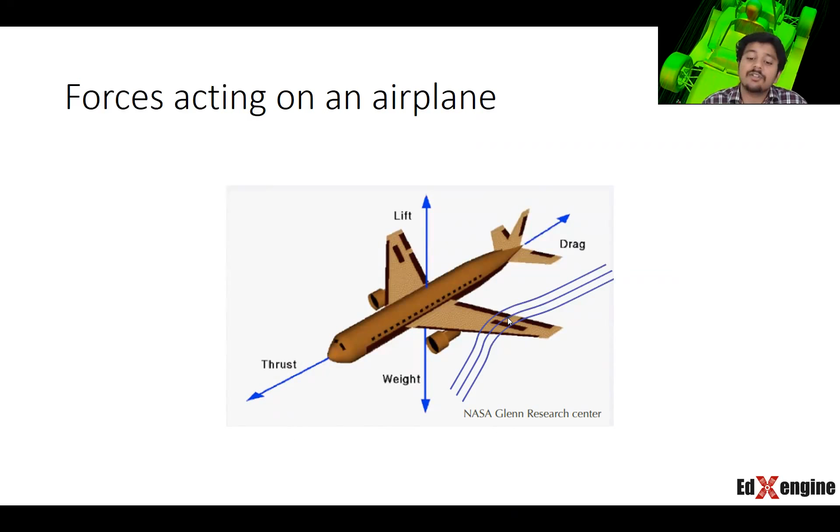And that is what people call as, what is the name for it? The thing right here. What is it called? Does anyone know? It's called an airfoil, exactly. So you might have seen this picture a lot, but many of us do not know what this is.

So we look at a cross section of an airfoil, and when you are designing an aircraft, you have to design multiple such cross sections, and that is what aerodynamics is all about when it comes to designing a flight. Now there are so many things. For example, if I cut this section and look at it in front view, it's going to look like this, right? I hope everyone can agree on this.

Now here, let's take a look at a couple of the terminologies. So from the starting point to the ending point, if I draw a line, that's called a chord line. All right. And similarly, I can draw a mean line, which is basically an average between the two curves. So at every point, if I just take the average, that's the mean line. So the mean line and the chord are completely different. I hope you can see it.

Chord is just joining the starting and ending point. Whereas in the mean line, you're taking the upper value and the lower value, averaging it, and computing a mean line. The distance between the chord line and the mean line is called a camber. Now, these are really elementary topics in aerodynamics, which you might have studied in a simple textbook, right? That's not the whole part.

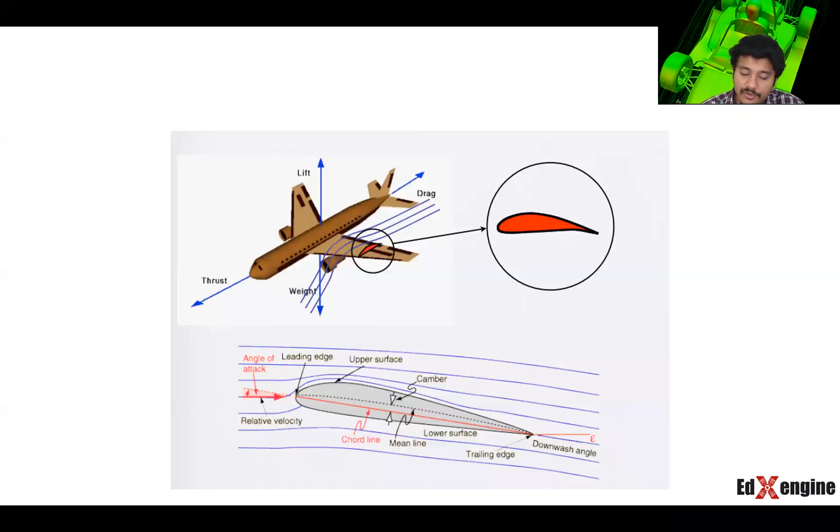A reverse wing is used in F1 cars. I don't know if you are all fans of Formula SAE, but if you look at those cars, we have a wing which is opposite to an aircraft's wing because it is designed to generate downforce and not upward force. This downforce is going to push your car and make it stick to the ground more. So when you're taking a turn in a corner at a very high speed, you are able to make the turn successfully, and downforce is required for that. All right. So let's go to a different picture.

So we have a parameter called angle of attack, which is fairly straightforward. It's basically how your airfoil is facing the wind. If your airfoil is aligned with the direction of the wind, then the angle of attack is 0. But if you've traveled on a plane, you'll see that when the plane flies, the wing has flaps, which actually change that. When you do that, you are increasing your angle of attack.

Now, when angle of attack increases, you get a larger lift. But what happens if the angle of attack goes beyond a particular value? Can anyone tell me? Stall. That's good. Can anyone tell me what stall means?

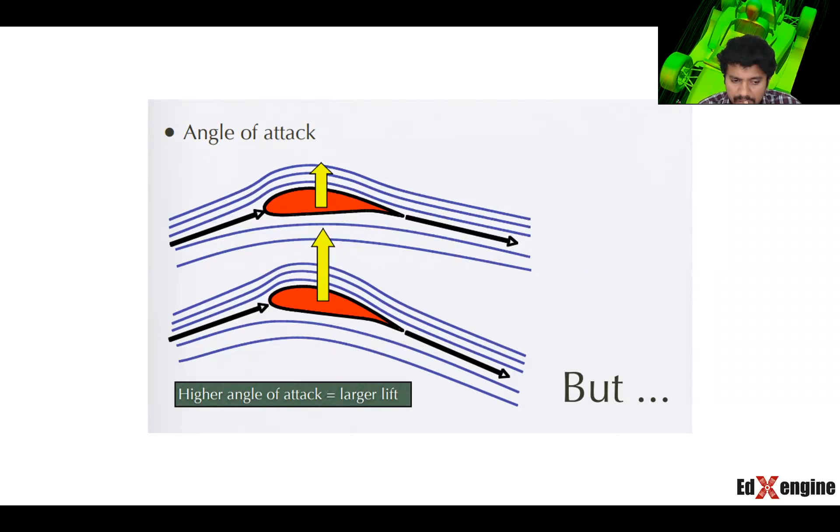Loss of lift is stall. But why does stall occur? What's the physics behind it? Can you think one step below? Why does lift drop? Exactly, flow separation. So who is the person? Tejas. So Tejas answered it correctly. The flow actually separates. Well, why does the flow separate? Because of viscous forces, exactly.

So can anyone tell me the physics in this particular zone? What are certain things that happen here? It's called the wake region. Can anyone tell me? Yes. The answer I'm looking for, Tejas hit it on the head - pressure is reduced. Can you tell me what pressure is reduced? There are two types of pressures. Are we talking about static pressure or dynamic pressure? We are talking about the static pressure.

Looks like a lot of people do not know the difference between static and dynamic. You guys need to read about it. So the static pressure drops. When the static pressure drops, at the end of the day your net pressure difference is getting affected, and because of that you are losing lift.

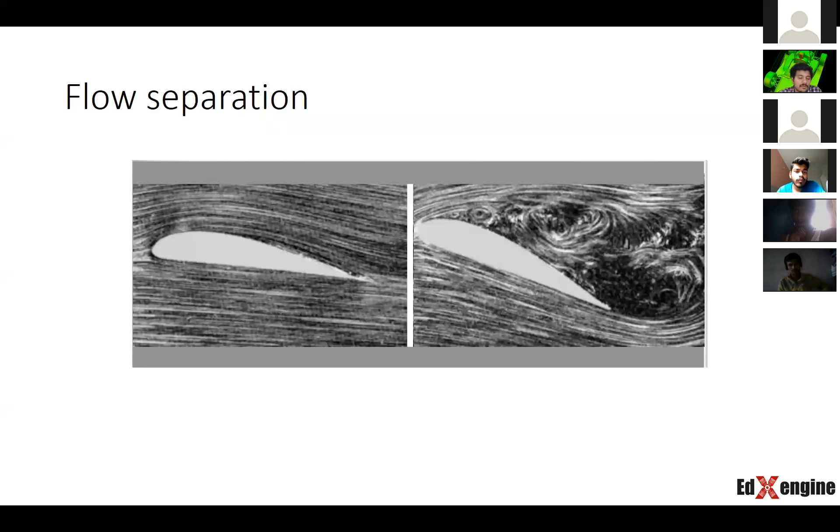In addition to this, there's one more drag force. Can anyone tell me what it's called? Friction drag, or what is it also called? There's a drag force associated with how the materials have been made - it's called skin drag. Exactly. So there are two types of drag: skin friction and pressure drag. Skin friction is more or less a constant, it depends on your geometric properties, but your pressure drag is a function of angle of attack. Now, based on this, you can compute a drag coefficient.

So a drag coefficient is nothing but a normalized drag force. So what does normalized mean? In engineering, you might have studied normalized, right? You might have not understood what it is. So think about this way.

Let's say you are running a 100-meter race. If 4 people are running the race, at a particular time the first guy is at 63 meters, second guy is 40 meters, third guy is 20 meters, and the fourth guy is like 70 or 75 meters. The idea behind normalization is instead of remembering these numbers, you take that number and divide it by the maximum number. So at a particular time, the guy's position can be given as his current distance, 63 meters, divided by the total meters, which is 100. So that's 0.63. You can represent the numbers now in these non-dimensional or normalized quantities.

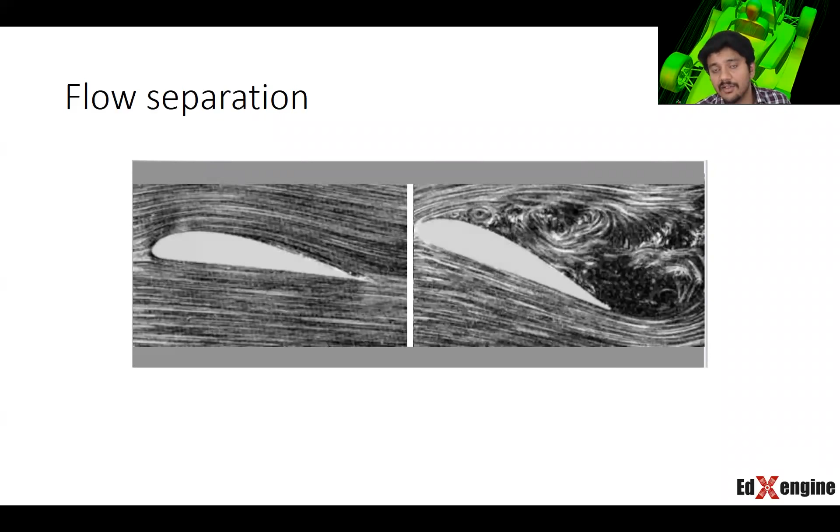Because if the flow separates early, the separation zone is going to be more. So in cases where we are not worried about the lift, the pressure drag is going to go up. But if I just keep pushing my separation point downstream, I can actually have a smaller wake region where my pressure loss is also minimal. So my drag coming from a pressure drop is going to be less.

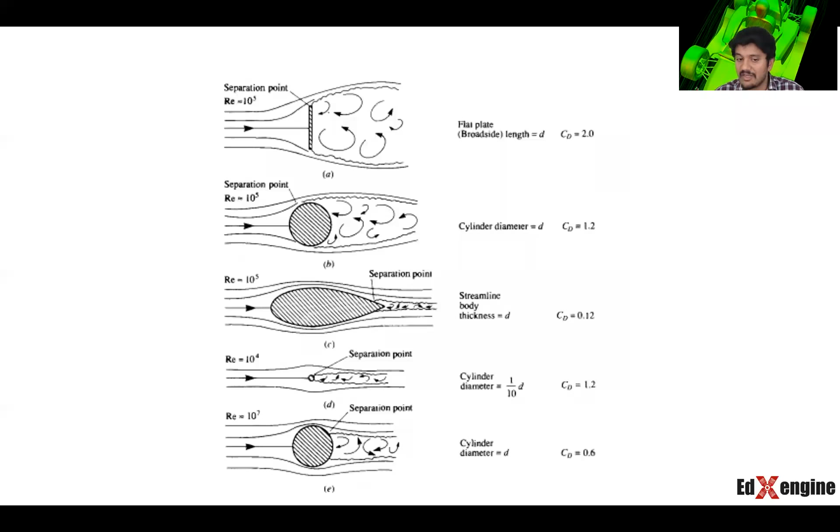Now, we are at a stage where we cannot just do simple calculations to come up with drag coefficient reduction strategies. Those times have gone. People were able to do it when cars were all rectangular. You can still see people driving rectangular cars, but now all cars are starting to look very similar. Why? Because they all have a streamlined shape, and flow separates much later in those cars, in terms of the position where it separates.

So how do we determine strategies to reduce drag? Now that you have some information, as engineering students, what are some of the strategies, or how will you go about determining a strategy to reduce drag force? What are some of the things that you will tackle?

Please explain about normalization again. Maybe I'll do it later, Mohammed.

Streamline the body, all right. So what does streamlining mean? How would you go about streamlining it?

Reducing weight is actually a fantastic option. Reducing the area is also a good option. So in the hand example, when I'm driving on a bike, if I keep my hand out like this, I'm going to get all that force on my hand. But if I just close my hand like this, the force is going to be smaller. This area is called the frontal area. You need to make sure you're reducing the frontal area of the car. So what does frontal area mean? When you're looking at the car in the front view, whatever area you see, that is called the frontal area.

Reducing contact angle—I don't know what that means. Streamlined in a way so that the flow moves around the body. Okay, that's correct. Slanting of the windshield, sure, why not?

Now a ball without those dimples is going to have a lower efficiency, right? And this is what drag does to you in terms of your final output. You need to start thinking about these connections. Instead of just thinking about drag as a force and keeping it abstract, try to apply it to real-world applications and try to understand what's going on.

Okay. Now, here's the thing. So far in aerodynamics, we have talked about drag force and maybe lift force, right? You want to make sure that lift is higher. Similarly, if you push the separation point, your lift will be higher. And that is why people have invented flaps. When you change the flaps, you are essentially changing the angle of attack without causing the flow to separate early. That is why when flaps are used, you get additional lift.

But are lift and drag the only problems we have to deal with in aerodynamics? What else is there? These are problems that have been studied from the 1960s and so on. So what are the other problems? Can anybody think of a problem? Okay. See, this is another problem I see when you're studying a subject. Try to have an open mind and ask a lot of questions. And you are not the only person to be blamed; the way things are being taught is also a reason for this. But think about other applications.

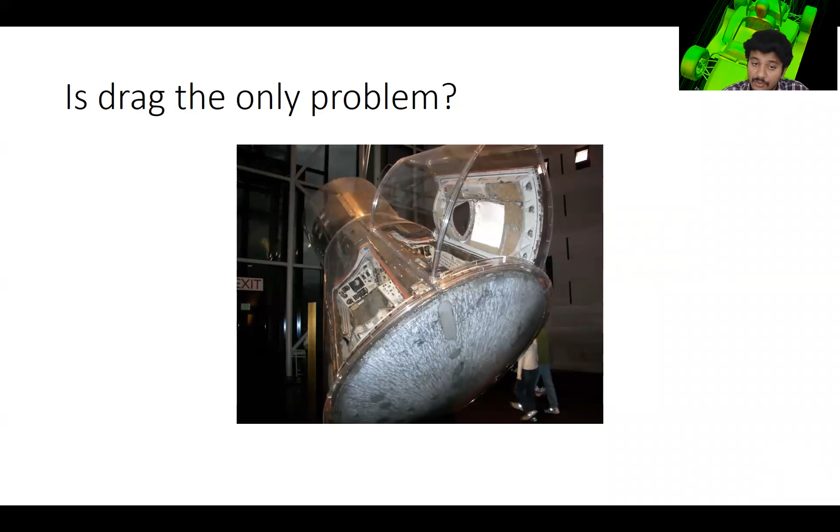So let me show you something more interesting. Here, this video I'm showing is from SpaceX. I hope you are all familiar with SpaceX, right? It's Elon Musk's company. You are looking at the heat shield, and we are trying to do a computational fluid dynamics simulation on this, all right? We have created a computational grid. This is the technology that SpaceX uses.

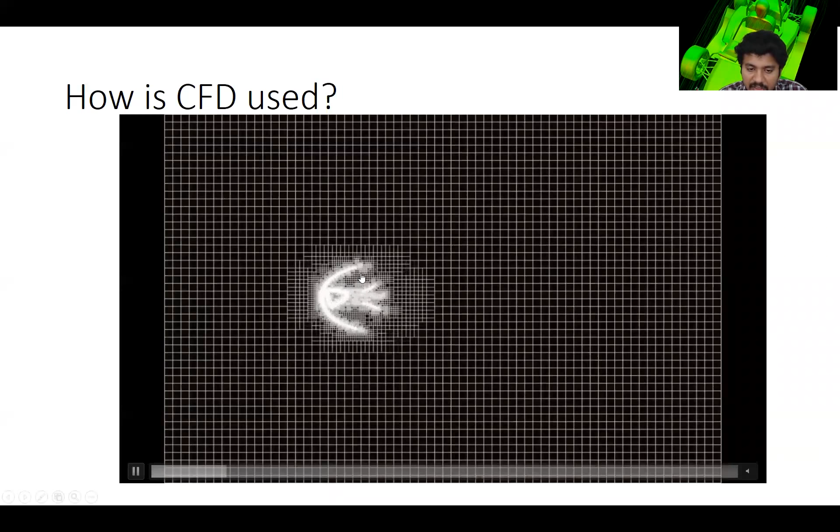So when I play this, it's going to take a little bit of time, and then you will immediately see. I'll just pause the video here. So you have this heat shield here, and you have a shock front. Can anyone tell me what the shock front is called?

There's a name to it, just because of the way it actually looks. It looks like a bow, right? Since it looks like a bow, it's called a bow shock. Now, what's happening here? We don't see any flow, but what's going on? Well, we are looking at only the computational mesh.

Now, this is a CFD simulation. We're slowly getting into CFD, right? Because with CFD, you are able to simulate all of these things. You are looking at the computational mesh alone, and the mesh is automatically being refined where the shock occurs. So you can think of it like this.

I'm pretty sure you guys have different types of phones. Some of you might have iPhones. Some of you have very cheap Android phones. Now, let me ask a simple question. Assume that all the phones are the same brightness, okay? Say you are looking at a wallpaper that is just white screen.

Some of you who have already attended this workshop before might have heard this question, so don't answer if you're one of them. But if you're looking at a white screen on an iPhone 10, the $1,000 iPhone, or your Android phone, on which of the screens is the clarity going to be better? You're just looking at a simple white screen. So everyone is saying iPhone.

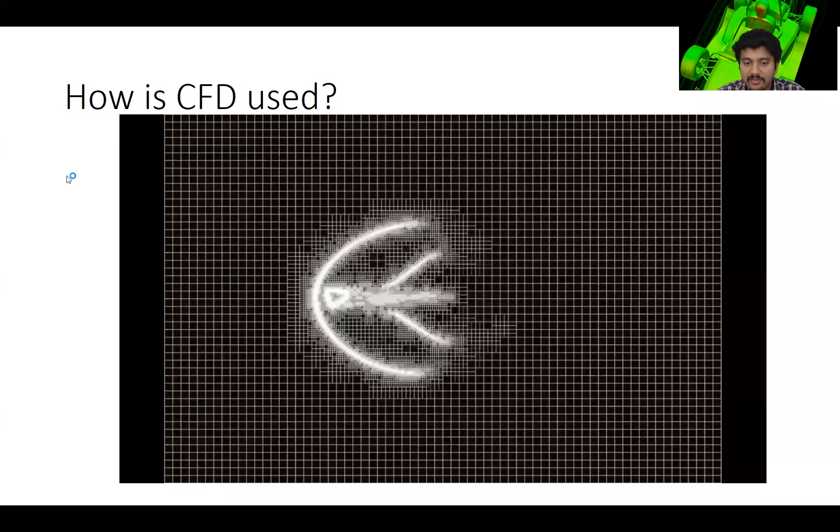Now, as far as how adaptive mesh refinement works, it's more mathematical. We look at the curvature, which is the second order derivative of flow quantities. It can be temperature, velocity, and density. You look at those quantities, and based on that, you refine the mesh. Again, this video is from SpaceX. It's their in-house solver.

So let's look at some more images. Here, what you're basically looking at is how the vortices are shedding. If I just play this, I think it's going to start playing somewhere here, right there. You see how the vortex sheds. And you can see the computational mesh is overlaid on top of it, and how this adaptive meshing captures not the shock, but the vortices.

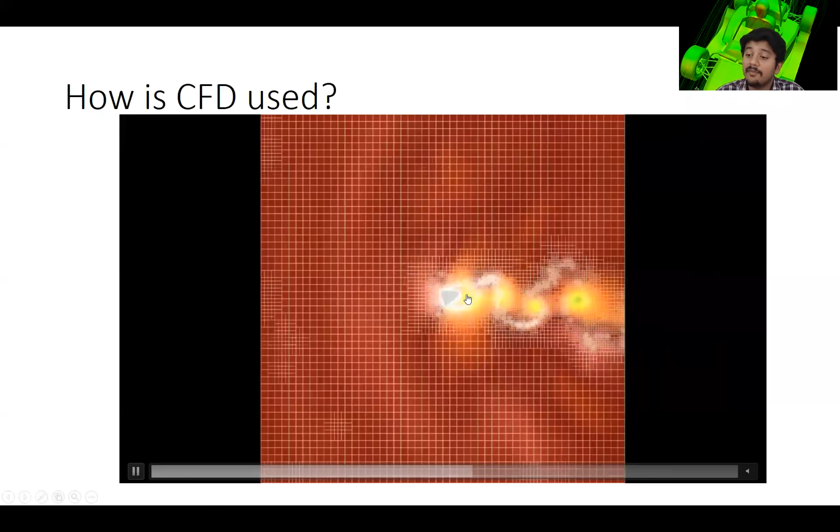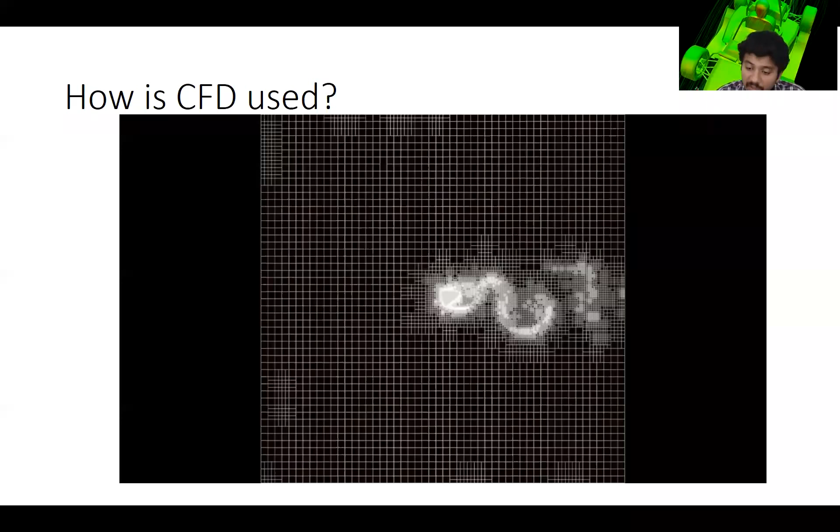Capturing these vortices is very important because they determine the flight performance. When a vortex takes place, the pressure is going to get lowered. So when the pressure is lowered, the pressure is higher on the front side of the heat shield, so the heat shield is going to move like this. And once the vortex sheds again, the pressure is going to be higher on the right hand side. So it's going to do this continuously. That is why CFD simulations are being used. And this is also aerodynamics.

Now here, for the same heat shield, we are actually looking at the specific internal energy. Just to go a little bit more technical, when you're doing a computational fluid dynamics simulation, you're simulating the flow. Flow has physical properties. Internal energy is one of the physical properties, and internal energy is related to the temperature.

So when a shock takes place, there are going to be large changes in temperature, which means there's going to be a large change in internal energy as well. And that is what we're looking at here.

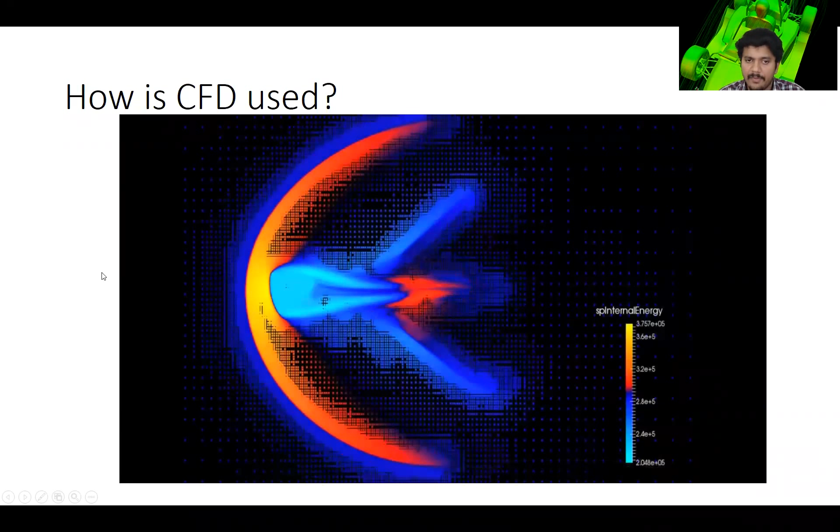I don't think this is moving. Anyway, all right.

So not just that. So we are looking at a landing gear here. People are simulating flow over a landing gear to see if the landing gear's design is strong enough to withstand the flow field, because your landing gear is a hydraulic system. Now, when you're testing it without any airflow, there is no resistance, right? But you're traveling really fast, and when you're deploying the landing gear, it's facing all those aerodynamic forces, and it needs to open stable in the right amount of time, correct? For that, people do simulations.

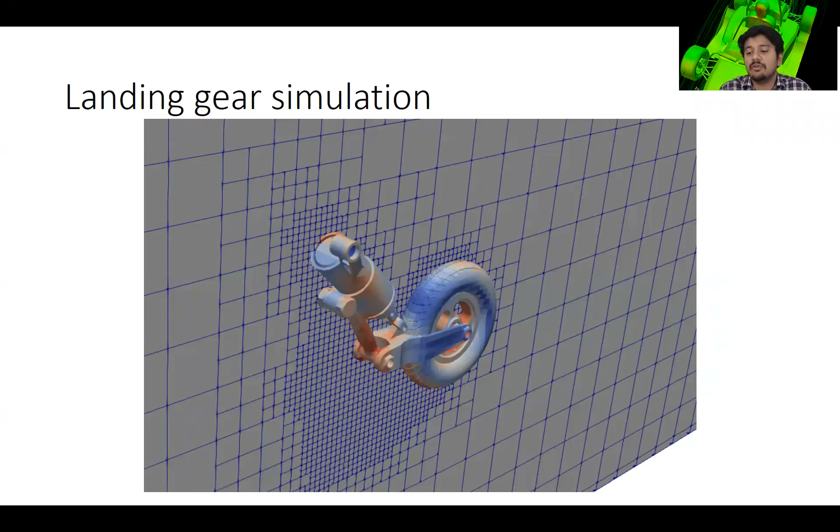And again, when you do this, you have to know how to model the geometry, how to create the mesh motion. So these are the things that people in the current age are doing. People are not doing airfoil. So if you're still learning about simple airfoil simulations, it's still good. You still need to learn it, but you need to graduate from that and learn these advanced problems. Only then you will be able to tackle these type of problems. And if your aim is to work for a larger company and do external aerodynamics at a research level, then you need to have experience in doing these type of problems.

All right. So how do we systematically improve our designs for a wide range of parameters? Now, the answer to that is computational fluid dynamics. There was a point in time where you could do a simple hand calculation to come up with better designs. But now think about it. If you're designing a Formula One car, it's not just going straight. It has to take a lot of turns, go over bends, go over slippery surfaces. In all those cases, you have to make sure that your design performs well.

When I used to work with Red Bull when I was at Convergent Science, when they design a car, they run at least 1,500 external flow simulations at different operating points to make sure that the aero panels they have designed make sense and are better than the previous generation. So CFD is the way to go. And here are a couple of advanced things that CFD is capable of doing currently.

So we are not doing airfoil simulation, we are simulating an entire plane. And as it pitches and comes back, we are able to simulate it. In the graph, you have time, and you are looking at the experimental data, which is black, and the orange data is the simulation. This is being done with Xflow. I've already shown this presentation in a different workshop, but it helps. Xflow is a lattice Boltzmann code. It uses an LBM solver. It's very similar to Navier-Stokes, but it's much more general.

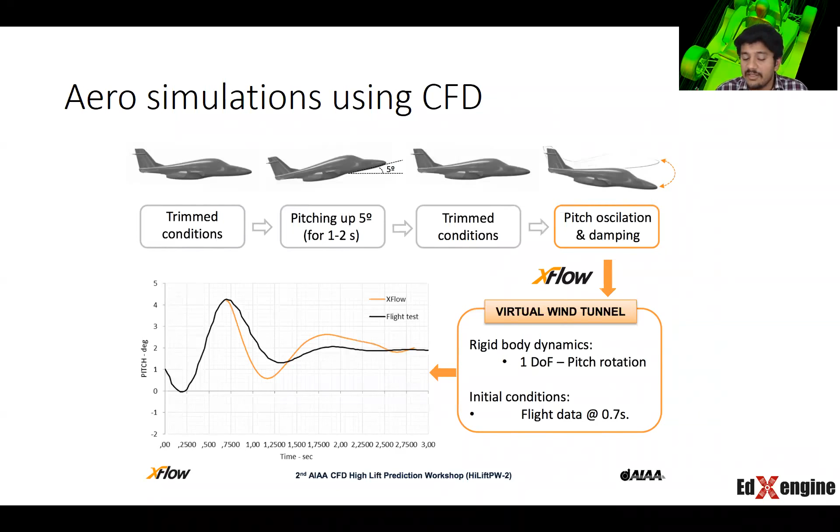Here's another cool picture. On the wing, we are looking at velocity information, and at the bottom, we are looking at experimental images of oil patterns, which represent the velocity. The higher the velocity, the more the oil gets scattered. And you can see that between experiments and simulation, there's a lot of correspondence, which is extremely encouraging. Setting up a wind tunnel test for a single data point is going to cost $20,000, 13 lakhs, think about it. And here I have lift coefficient and drag coefficient at different angles of attack.

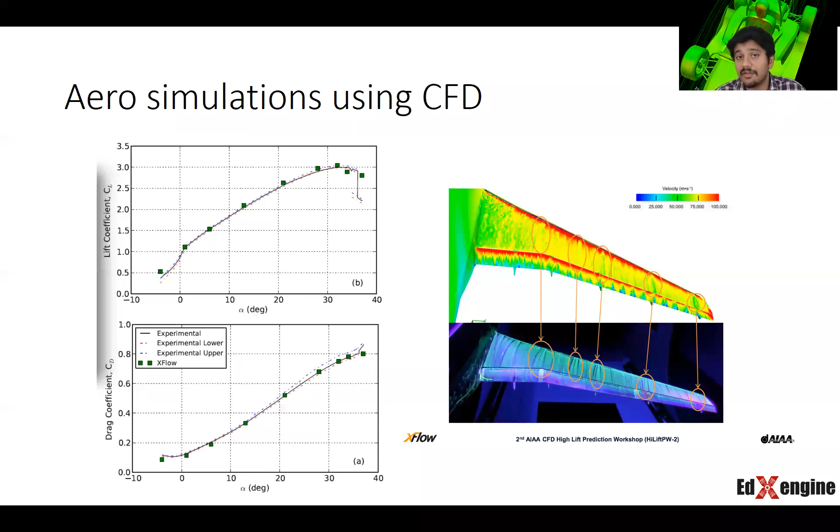Now, you need to have experience in solving these type of problems. I know that the school you're currently going to might not have those facilities, but that's the type of courses you need to take if you are interested in getting jobs in companies that do simulations like this, right? The reason I'm saying that is here in the US, a lot of undergraduate students are doing this because the university system is such that students have access to computers, to software, and more importantly, to the right trainer who can actually teach all these things.

All right. So how can you do these things? Well, from when you're still in school, make sure that your fluid flow fundamentals are very strong. You need to start learning about boundary layer theory, which we have not talked about because I thought it might get a bit complex. You need to understand things like the viscous sublayer, the buffer layer, and the outer layer. You need to understand these things. I'm not going to explain it because you have to study a lot to learn these things.

And then there is something called turbulent viscosity, and there's something called viscosity ratio. You need to understand these things. You need to know the basics of CFD. You need to know what Navier-Stokes equations are, what discretization is, and then you need to understand what a steady state simulation is. And then that will actually help you learn CFD a little bit. Now you put all of these things together, you learn turbulence, then you can attempt these types of problems.

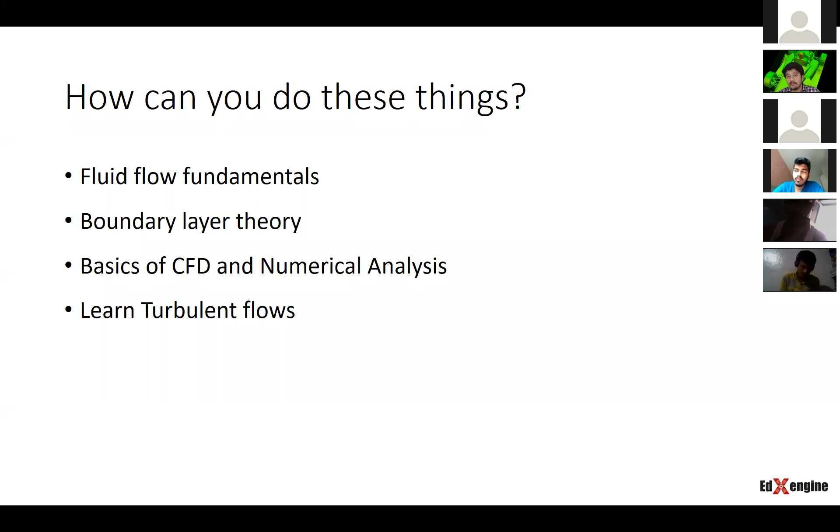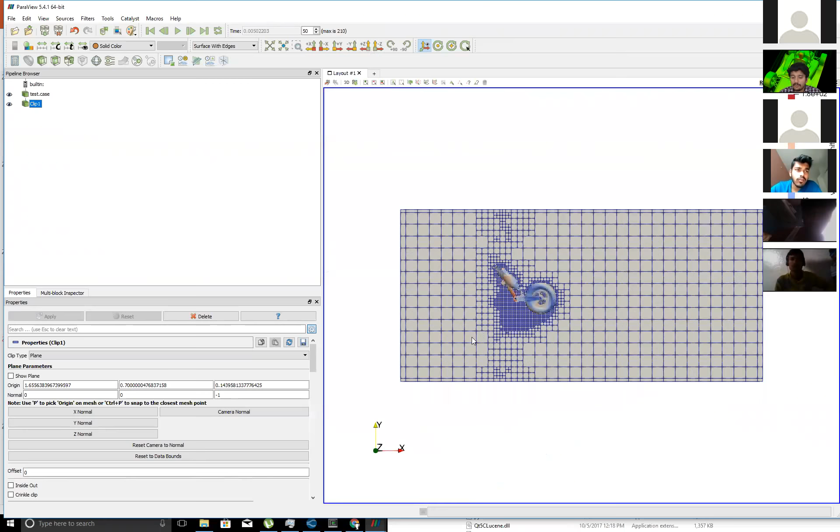All right, so now let's go for a demo. So what I did is I actually set up a couple of simulations for you guys to show how things look. So here, the landing gear that I showed you, it's basically a simulation that I set up. Let me put the geometry like this. You can see that the computational mesh is very similar to what SpaceX did, right? You can see the adaptive mesh refinement here. Let me just zoom in a little bit more so that you can all see it.

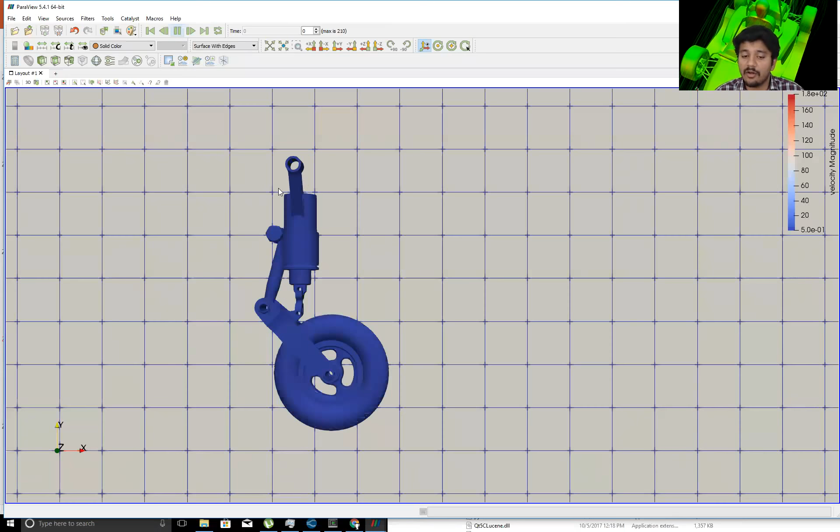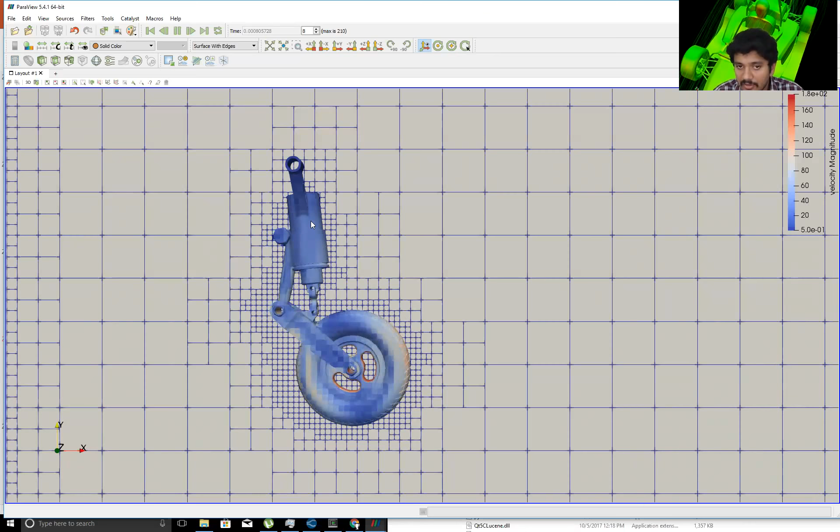Okay. So here, what I've done is I've colored the landing gear by velocity, and I'm displaying the computational mesh. Let me go to the start of the time, and I'm going to play the simulation in real time, so it's going to be a bit slow, but I can explain what's going on. Initially, the computational mesh is uniform, and then you can see that the landing gear is trying to close, and as it closes, it's encountering flow. You can see that the landing gear is being colored by velocity. I can color it by pressure to look at the pressure force, but you can see what's going on. Maybe I'll just stop it here.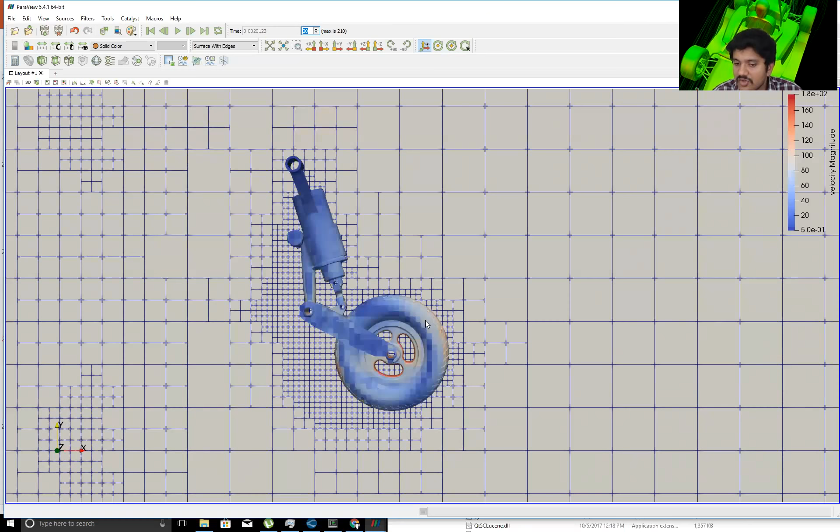Maybe go to time step 20 so that I can show you what's happening. Now you can see that it's closed a little bit more, and the computational mesh is automatically changing. I'm using the adaptive mesh refinement technique to automatically change the grid, so you can see that I don't have to use fine cells here. In the wake region, I'm using fine cells. As the adaptive mesh refinement takes place, it's going to refine everything. So if we go to a different data point, maybe 50, now you can see that the position has changed, and the mesh has also changed. So that's the advantage of using adaptive mesh refinement.

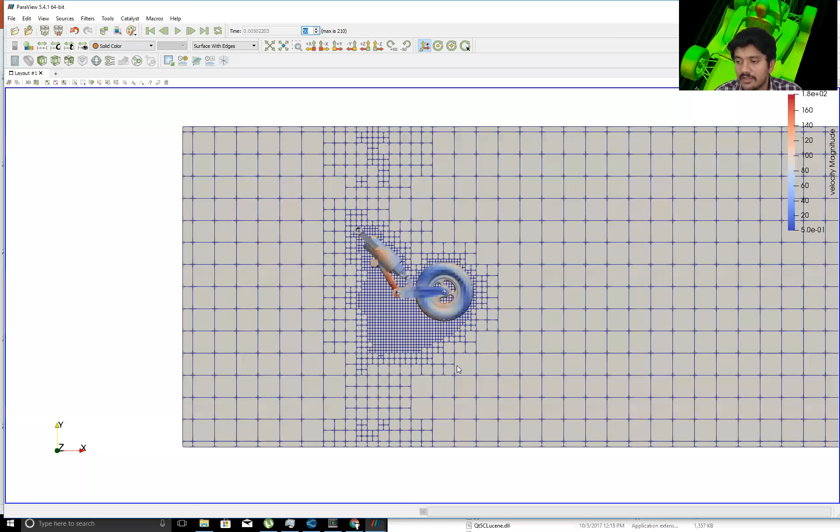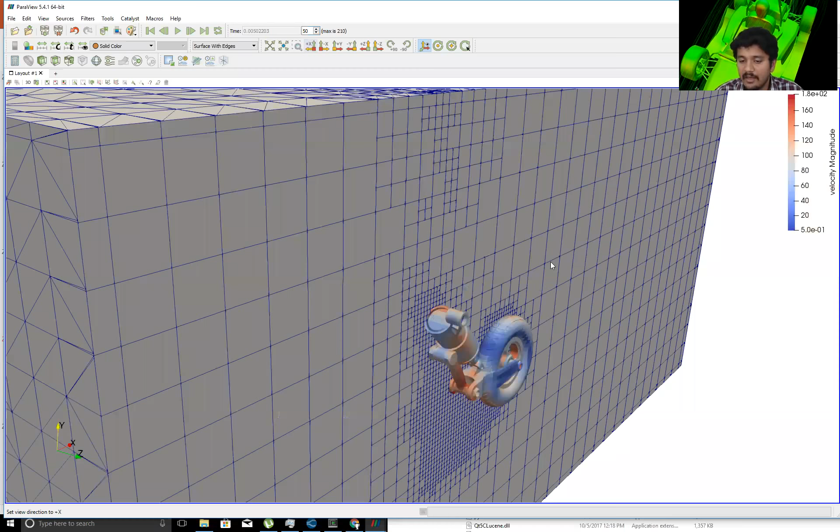For those of you who are seeing it on mobile, hopefully this view is clear. This is a 3-dimensional simulation, guys. I've created a clip plane and I've just cut the clip plane. So this is a 3D simulation, okay? Don't think that it's a 2D simulation. Maybe I'll just move it a little bit more, maybe to 100. And now our landing gear has completely been deployed. So now you can see the flow structure is quite different, and that's why you're getting the grid like this. I did this simulation using a software called Converge CFD, and I'm post-processing the results using ParaView. ParaView is a post-processing tool.

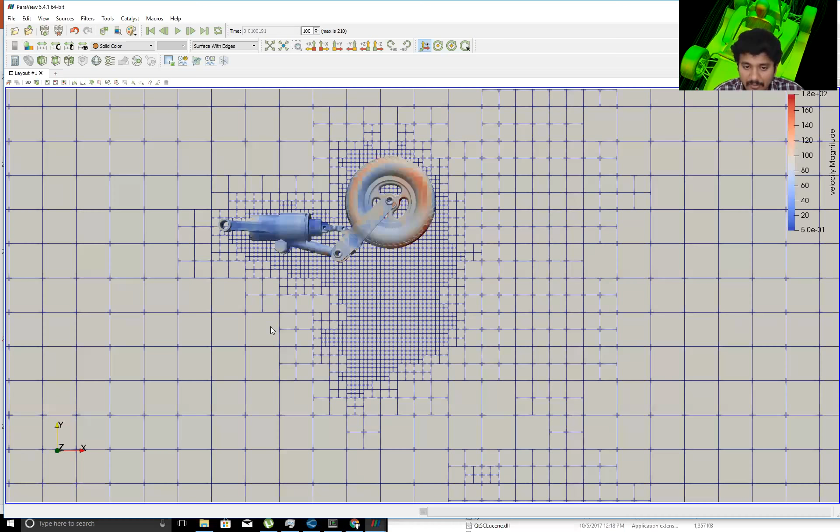Now that being said, I wanted to show you another application, and this is slightly more interesting and very, very challenging. I hope you guys can see the image behind me, right? Can anyone tell me what that vehicle is called? I don't know if you're able to see my face right now, but can you see the image behind me? Can anyone tell me what that vehicle is?

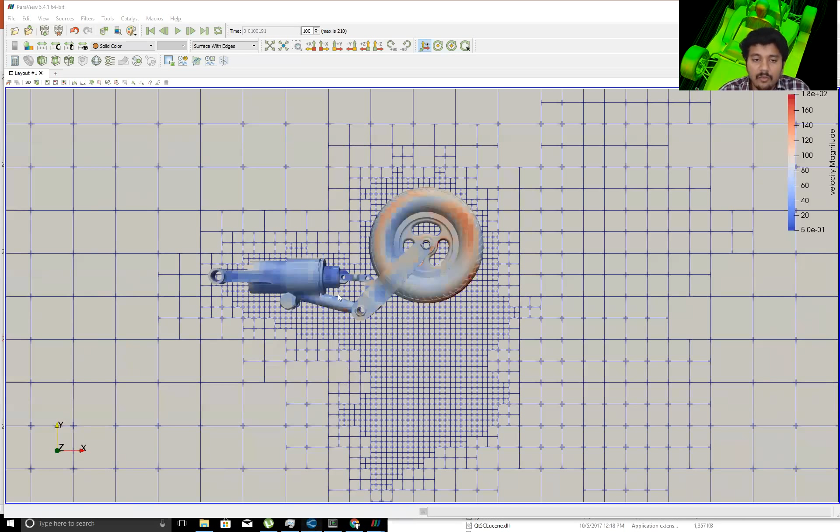So what does it actually take? With tools like SolidWorks and ANSYS Fluent, you can run simulations very easily. But the whole point is, there's a lot of physics that you need to understand to set up these simulations accurately, or most likely you're just getting colorful images and your simulations are wrong. So here, I hope you can all see the vehicle. I'm creating a virtual wind tunnel simulation here. My wake region is slightly smaller because I'm just doing a demo.

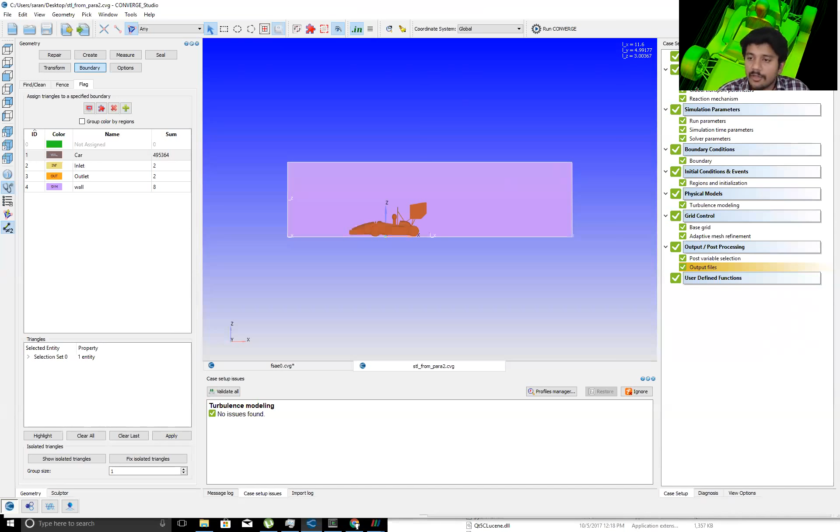So here I have my vehicle, and I've placed it with respect to the inflow and outflow boundary conditions. This is my inflow and this is my outflow. When you're placing your model, it has to be placed at the right location. It cannot be too near the inflow, or too near the outflow. This comes from a computational fluid dynamics standpoint, because your boundary conditions will get affected, and you'll still get results, but the results are bad. So for those of you who are setting up external flow simulations in SolidWorks, if you are not taking into account these considerations, your simulations are wrong. You cannot trust it.

So now, in this particular case, I've set up my simulation. Let me just go over some parameters. At the inlet, I'm specifying a 2-bar pressure condition. Now, where does this pressure come from? If you're actually doing a wind tunnel test, you will have a particular Reynolds number for it. From that Reynolds number, if you have a static pressure or a total pressure sensor at the inlet of your wind tunnel, you know that value. Alternatively, people prescribe the Mach number at the inlet. From the Mach number, you can compute a velocity and give a velocity boundary condition. So which boundary condition to use? Well, it depends on the experimental data availability.

And not just that, for example, in your car, you need to use a law of the wall boundary condition. What does law of the wall mean? I'm pretty sure most of you have done Fluent simulations, and you would have definitely checked this option called law of the wall. But what does it mean? If you have been setting up simulations without understanding all of these things, you have been just clicking buttons, right? This comes from turbulence modeling. At the end of the day, you're solving Navier-Stokes equations. But in order to solve turbulent flow problems, you cannot use Navier-Stokes equations as it is, because if you do that, you need enormous amounts of cells.

So just to give you a number, can anyone give me an example? In a wind tunnel, what's approximately the Reynolds number? If you're testing a car in a wind tunnel, what's the Reynolds number? Can anyone do a quick calculation? 2,200. Approximately 2,000. There is 1 lakh from Tejas. See, these numbers are really low. The answer that Tejas gave is the closest. It's typically around 1 million. 1 lakh is still just 5 zeros. You need to add 1 more zero there and more.

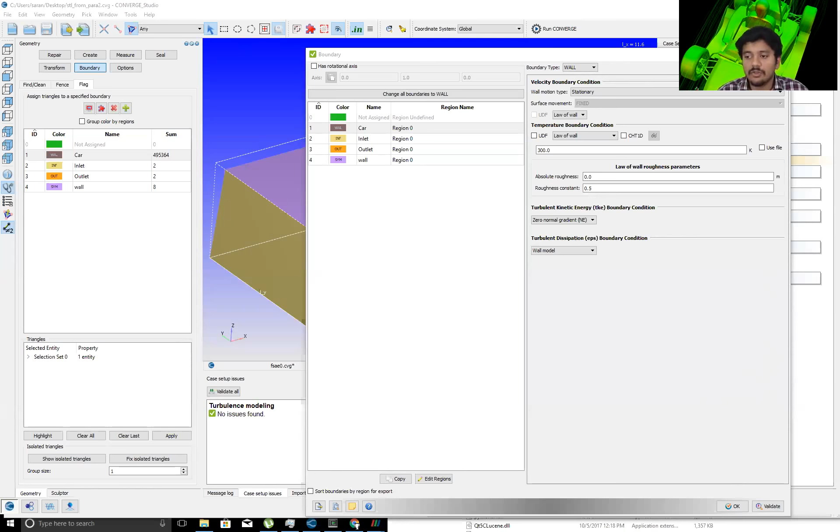All right, so what else is here? Well, I'm going to be using turbulence modeling. If you're looking at turbulence modeling, what turbulence model do we use? Do we use RNG K epsilon? Do we use standard K omega SST? Realizable K epsilon? Which model to choose?

Now there are proper engineering calculations, or a systematic process that you can follow to determine which turbulence model to use. In order to understand this, unfortunately, you need to learn the theory. If you don't learn that theory, you do not know the difference between standard K epsilon and RNG K epsilon, which means you do not know when to use which. If you use one model over the other, the answers are completely going to be different.

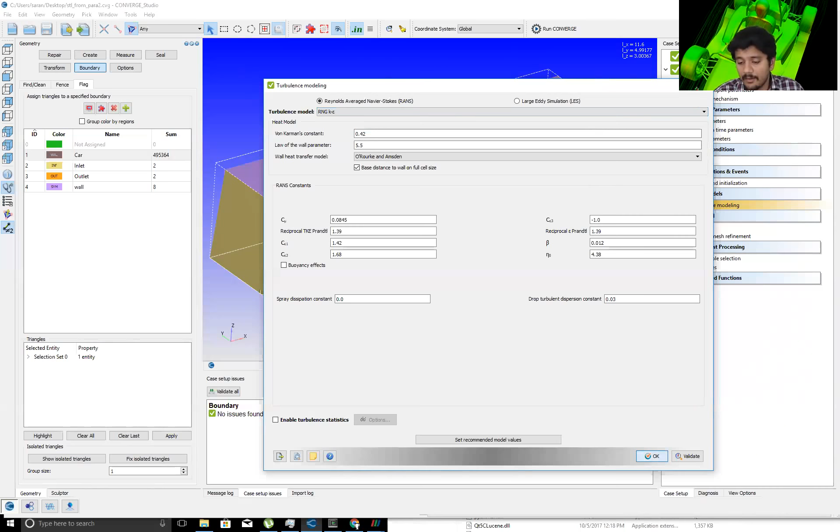Anyway, okay, so I have the simulation here. In addition to this, I've also set up adaptive mesh refinement. Here I'm basically using a velocity-based adaptive mesh refinement, because I know that for this problem it makes more sense. Adaptive mesh refinement is a slightly challenging topic, slightly more advanced. You need to have a bit more mathematical background to understand what curvature of velocity means, or what second order of velocity means, and then how you can set up a subgrid scale criterion to determine when the mesh needs to be refined.

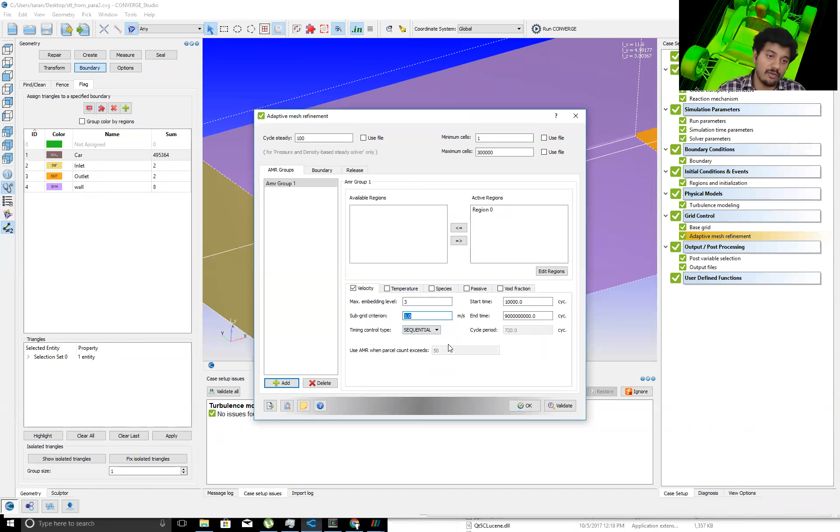Okay, this is a fairly simple simulation. Let's take a look at it in ParaView. So I ran the simulation in my local cluster, and this is how the simulation looks like. Well, there's a lot going on here, so let's hide a couple of things. I'm going to first remove the streamlines, and I'm just going to show the cut plane.

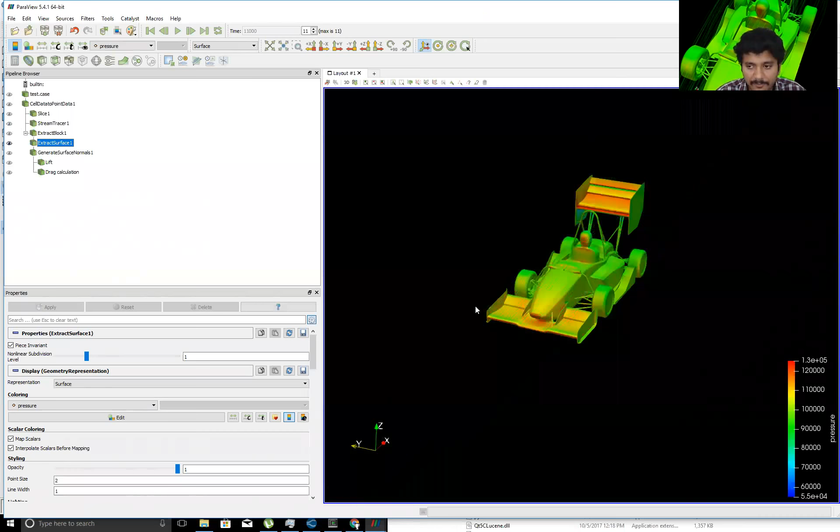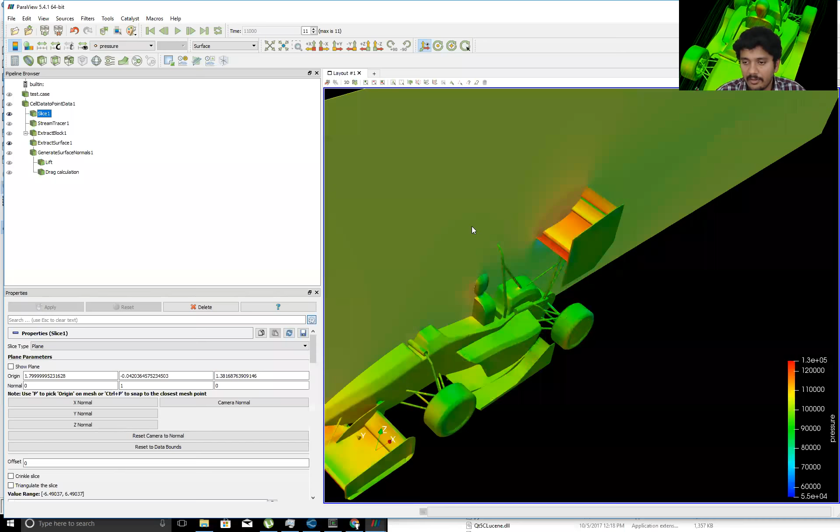All right, so here, guys, what I'm doing is I'm making the cut plane and I'm coloring the cut plane by pressure. Okay, so just think about it, right? The concepts that we discussed at the start of the workshop, you can actually see it here. So you have a wing here, and the way the wing is designed, you can look at the pressure in the cut plane.

The pressure is higher on the top of the wing, and if I go to the bottom, the pressure is lower. So that's opposite of an airfoil, correct? So this is what is going to give you the downforce.

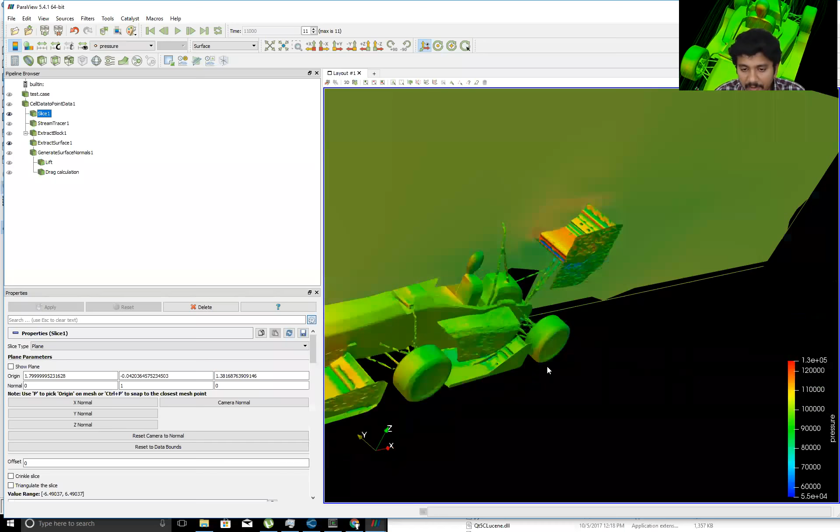Now, similarly, what you can do is, if I hide the slice and just look at the model in front, you can see the areas where the pressure is really high. You can see that the pressure is high here because that's the part that first faces the flow. And again, we have an approximate passenger here, or a driver. You can see that he is a larger source of drag because he's facing the flow up front.

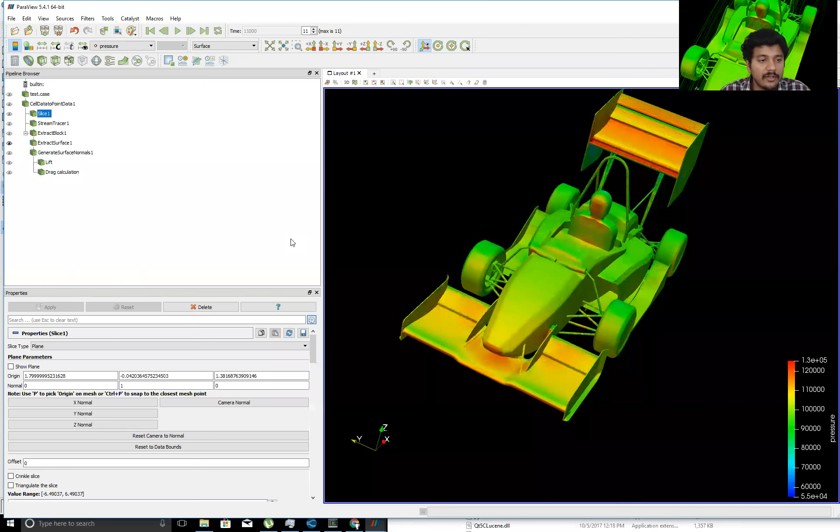All right, so what I've also done here is, and I think I should be able to show this. Okay, so I've basically created variables for lift and drag forces. Now, when people show lift coefficient, they just give a single number. Well, lift is not a single number. At each and every point in your domain, your lift is going to be different.

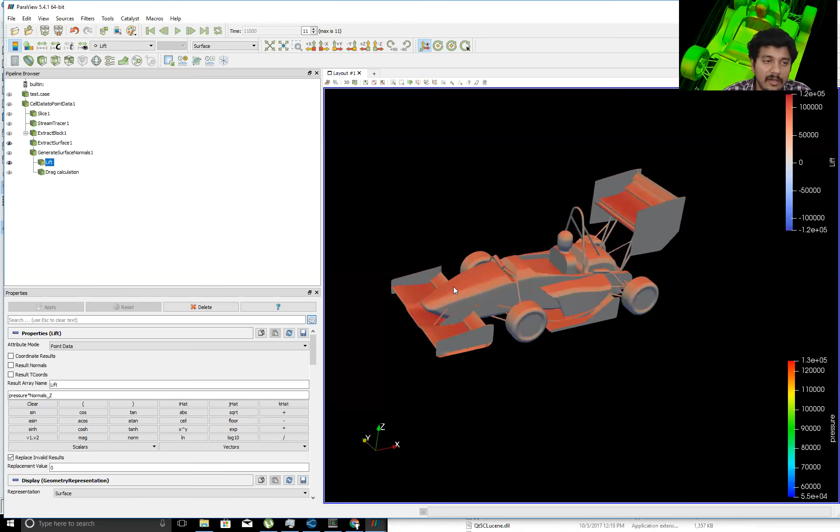So maybe let me just change a color map here so that I can see it much more clearly. All right, so you can see that higher values means there is a higher value for pressure along the z-axis, or along the negative z in this case.

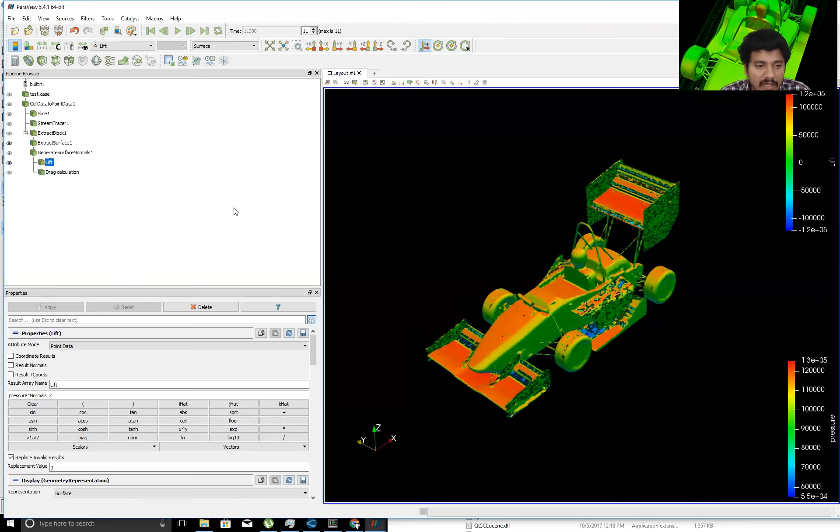Okay, so similarly, I can look at drag calculations. All right, so when I enable drag, maybe what I'll do is just hide a couple of things. And for drag calculations, I'm just going to change my color map to the same one so that I can see it much more clearly.

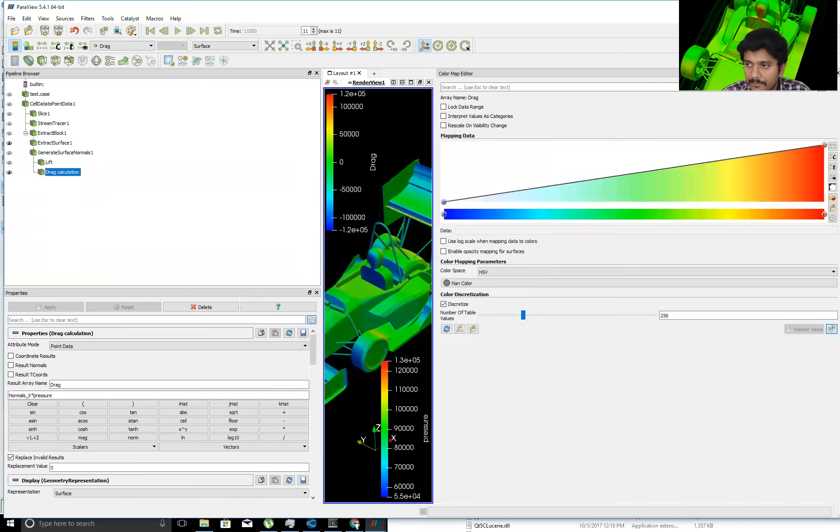So this is my drag coefficient, or drag force. Again, your drag, at each and every point there's a particular value. Okay, and think about it—like the pressure, it's basically a pressure component, right? And these are the locations where you're losing pressure.

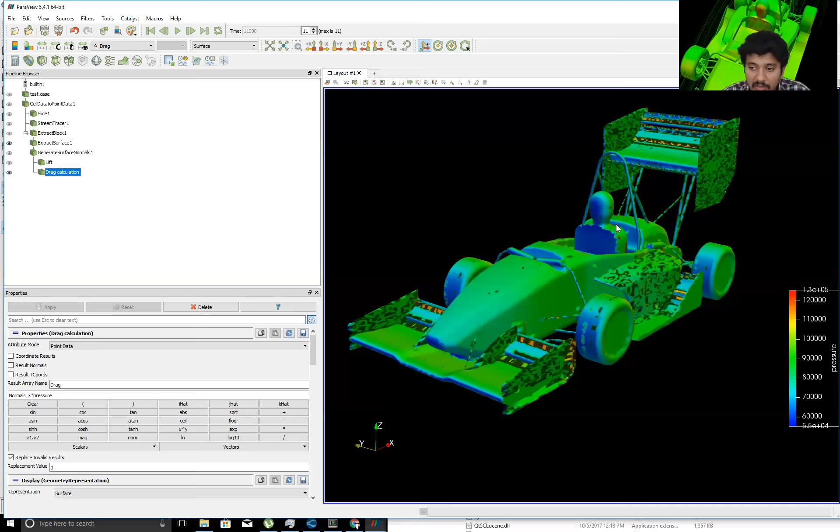All right, and these are the things that you need to be looking at, and you need to change your designs in CAD and then do the CFD simulation to understand how the result changes systematically.

Just running one CFD simulation is not enough if you think about it. You have a baseline design, and from that you need to look at flow separation, make some changes to see if you are pushing the flow separation point, and quantify the results. For example, if I'm interviewing you, you need to tell me, hey, I increased the size of my wing by 10% and achieved this much lower drag force, and I feel like that happens at this particular speed.

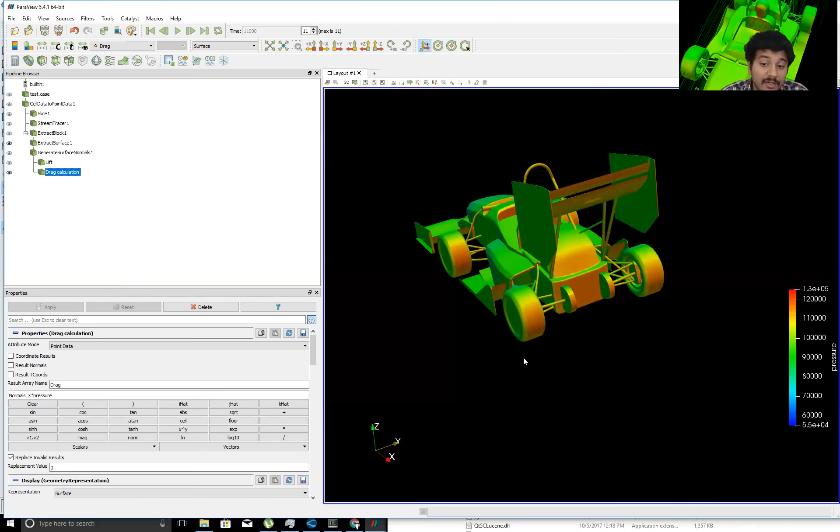And when the yaw is 0 - so yaw refers to how much your car is rotated, in this case yaw is 0 - that's the type of data analysis you need to do in order to get an internship or even a full-time position in a good tech company.

Well, that being said, let's take a look at some other plots here. I'll just color my vehicle by a solid color. All right, and then let's take a look at the stream tracer.

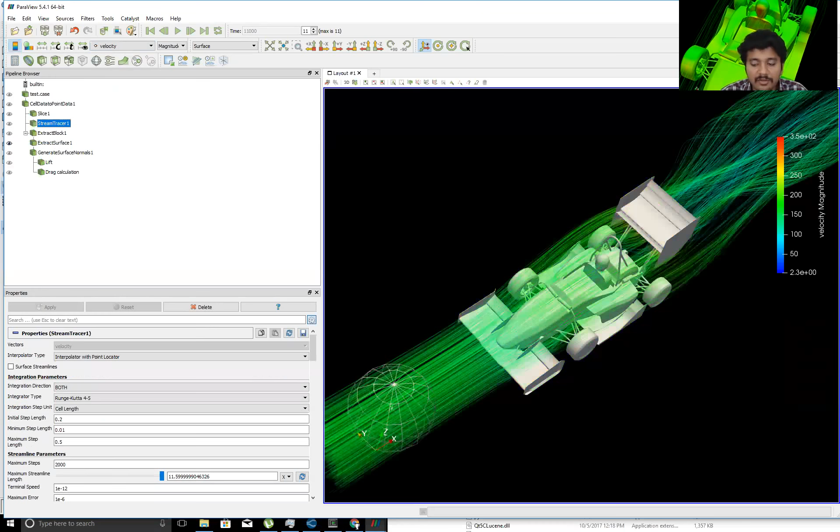Stream tracer is basically injecting particles - let me just hide that sphere. The way this works is I have a spherical source where I'm injecting some particles and just following it. So I will just hide that sphere.

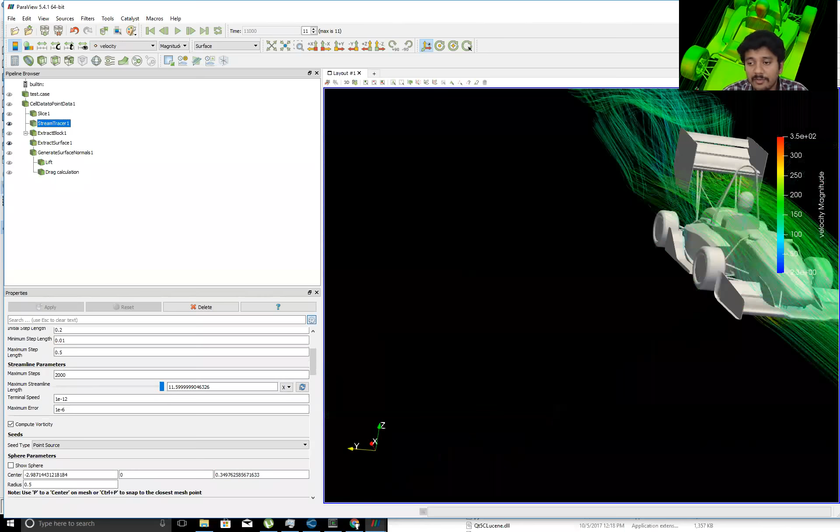And here you can actually see something very interesting that a lot of people notice. So when I put it like this, do you see the vorticity? And what I can do is just hide this guy. Do you see how the vortices are formed? Can anyone tell me what these vortices are called?

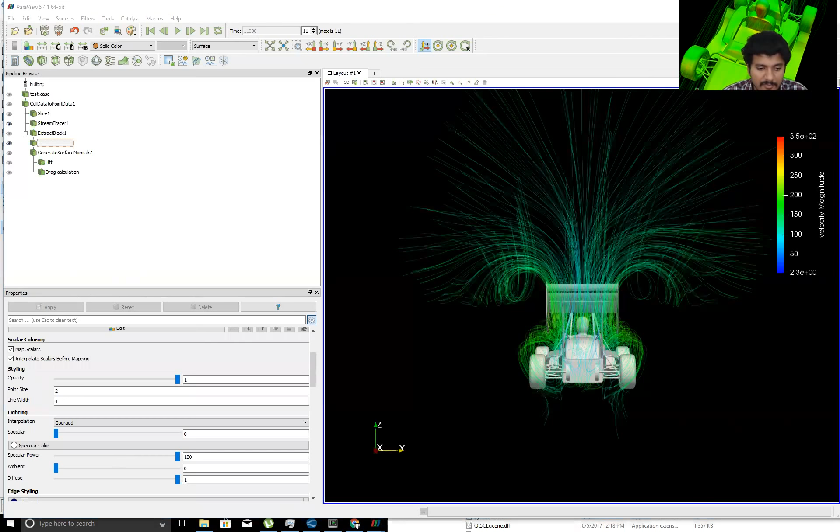Wingtip vortex, but yeah, they have a particular shape to it, right? Okay, well I'm not able to see the chat window here. It's not turbulence - okay, maybe that's an exercise for you guys. You need to understand and tell me what type of vortex this is.

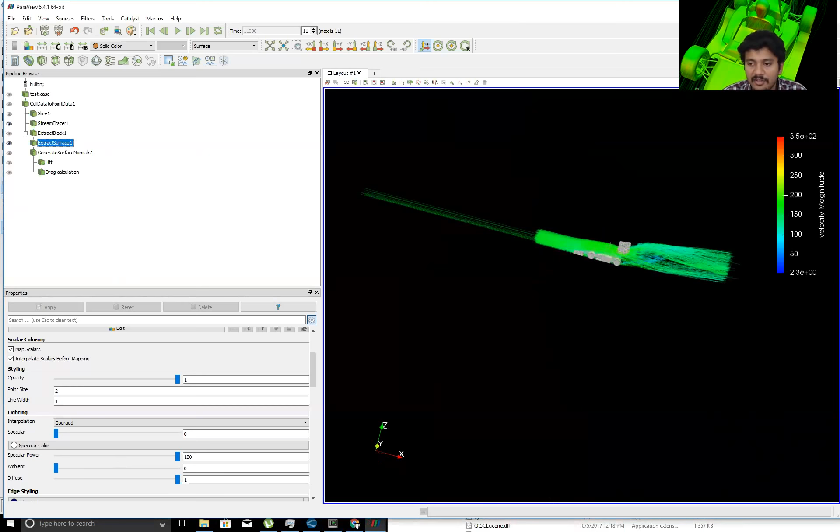Okay, so these are things that people look at. And if you're someone in FSAE who wants to do analysis, this is how you would do it properly - and this is just a single simulation. It doesn't stop there. You need to set it up correctly, do a grid dependency test, run the simulation at multiple grid points, change the models in multiple ways, and only then can you make conclusions.

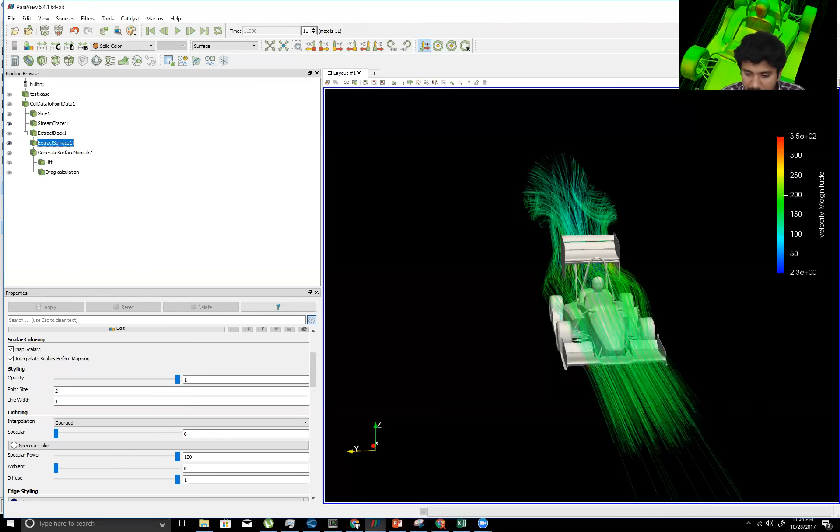All right, so with that, if I can move back to my presentation. All right, any questions, guys, until this point? Does anyone have any questions?

Some of you have pinged me asking how you can learn CFD and the things I've shown. I'll be talking about that next. But does anyone have any questions?

At inlet, can we take atmospheric pressure? Well, it depends - you can take atmospheric pressure. If you're doing wind tunnel testing, most likely the pressure is not atmospheric, because there is a wind tunnel where people do the testing under compression.

So the intake pressure is higher. The drag reduction system in F1, how does it work? Well, I'm not very familiar with the drag reduction system. I don't know if that is - yeah, I'm not that familiar.

What is the abbreviation of CFD? CFD stands for computational fluid dynamics.

Tejas, does the total pressure remain constant through the airfoil even though flow separation occurs? That's a great question - what do you think, Tejas? Think about it, I think you can figure out the answer. In a separation zone, what happens to the velocity? Think about it that way.

So when a plane is landing, what will be the pressure situation on the airfoil? Well, you gradually decrease lift. That's what you do, because in order for the plane to fly, your lift force should be higher than the weight of the plane. So when landing, you need to reduce the lift force so it's slightly lesser than the weight, giving you a resultant force, and based on Newton's law, you have a particular acceleration with which you come down.